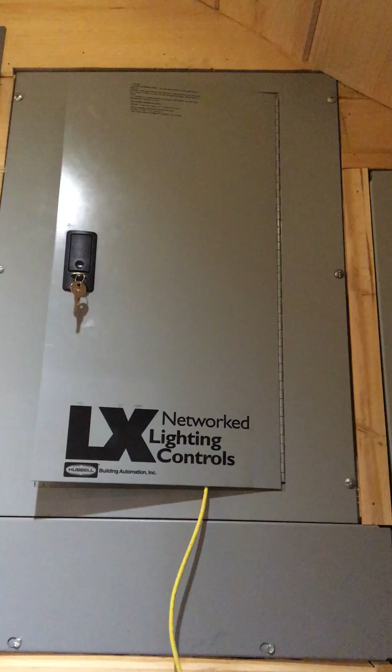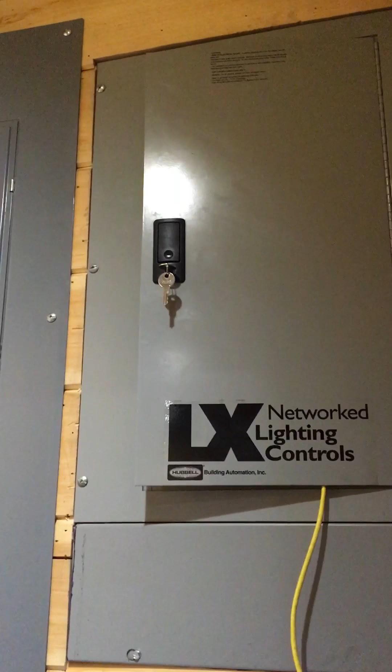Okay, so this is just going to be a quick overview of our LX lighting, our Hubbell LX lighting controls network. We actually have multiple of these out here at the facility. Essentially what we have here, this is the main relay panel.

This is one of the touchscreen tablets, with a longer cord so I can sit down here and work on it. These touchscreen tablets are first gen touchscreen from what I can tell. They're pretty clunky, but they do work.

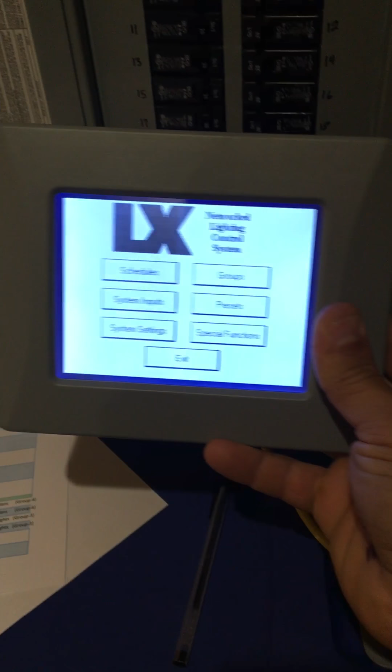This is a good one here, or it seems to be. I keep it separate from the others. I try to keep one at every unit, but this is the one I primarily use when I'm controlling from the building. The other thing we have is an interface.

I think that's like a Gen series, some sort of interface that we have plugged into our phone system. Our IT guy set that up, but it allows us to remotely log into these systems from the office and make changes from our office. So making changes is a whole lot easier and quicker than having to manually cycle through each setting here on this controller. So once again, you have your tablet controller, primary panel, and then our interface and modules.

I am not an expert when it comes to LX lighting controls. I have spent a lot of time reading the manuals. There's a lot to these that I do not understand as far as where the actual brain of the system is and all that kind of stuff. But my hope is that this allows an average technician or maintenance man to be able to program these systems and keep things up and going from a maintenance standpoint.

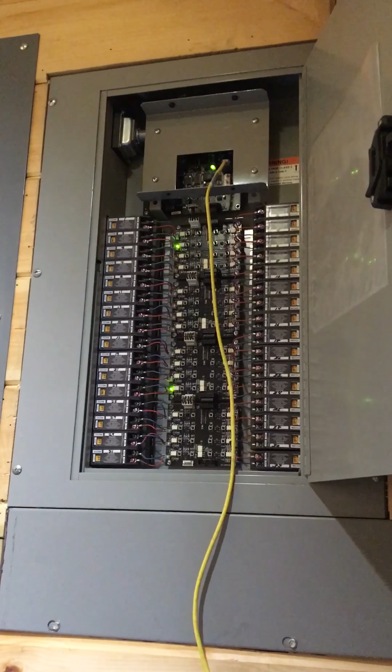Hubbell's technical support is lacking. There's about 2 guys that will answer questions. Both of them talk way over my head, so I've not found them very helpful.

So what we have is each of these is a relay. Each relay has a power feed coming in from your breaker box down here at the bottom. So this is panel C. This is all of my lighting controls, fan controls, everything that this panel controls. So you're going to have your main power feeding the relay, and then this relay is essentially controlled off of a computer that switches the relay, allowing the power to leave and go to the actual fixture.

So each of these, your relay number 1 is currently in the off position because the light's not lit, but we can push this button and we've turned it on. Off. So the first thing I had to do when I came in and started working on these systems was figure out what everything did.

We had a little tiny layout here, but it was never filled in. I had no clue what did what. So we literally had 2 radios, and one guy walked around, he would hit a switch, and I would just watch the light turn on. He would say, I'm in bunk room A, and he would hit the lights and it would bring that relay on. So I just wrote everything down and came up with this.

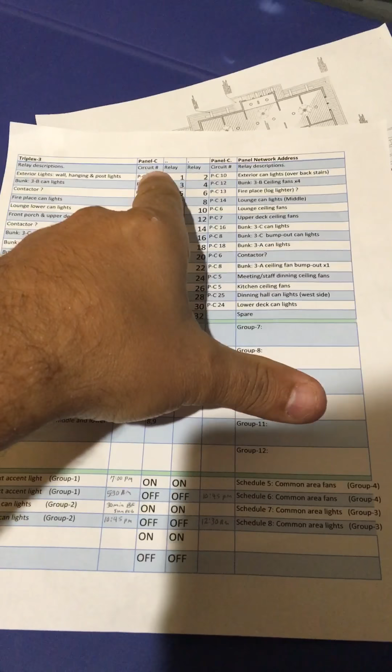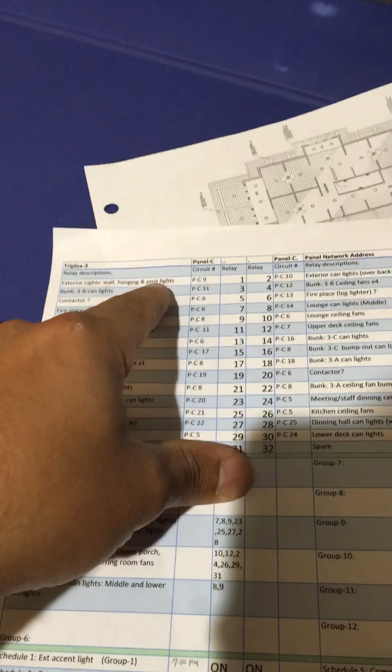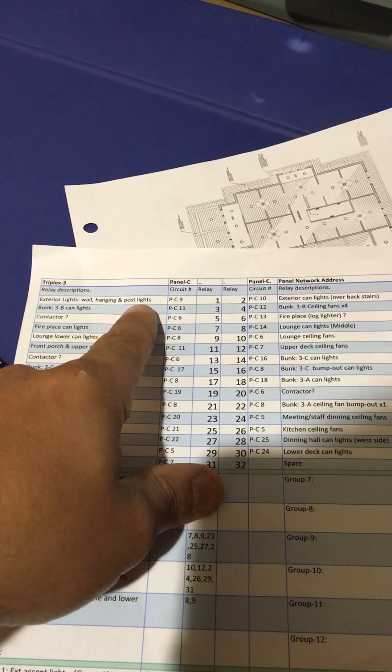So this is critical. This is our building triplex 3. We have the panel and the relay number here. So relay number 1 controls my exterior lights, wall hanging and post lights. There is not a switch station in this building for this relay. This relay is solely controlled off of its own group, but I have it controlled off of a schedule. So it's critical to come up with this.

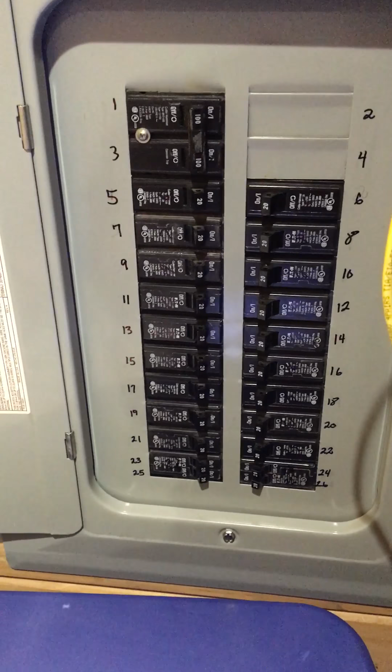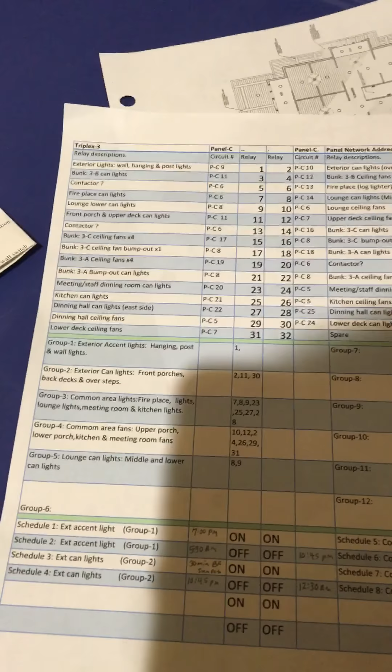So we have the description, the circuit number. My breaker number 9 in panel C will turn the power off to that relay. It doesn't turn the power off to the whole panel, just to relay number 1. Okay, and then we have our groups. So once you get all of this set up, you can actually start programming your groups and your schedules. I've got a video on programming groups and a video on programming schedules, but you essentially go in and program your groups and schedules once you know what does what.

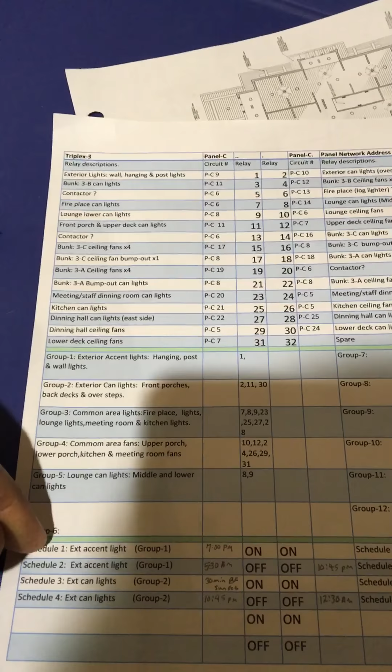So the way I have it set up here is my group 1, exterior hanging lights, post lights, blah blah blah, and that is relay number 1.

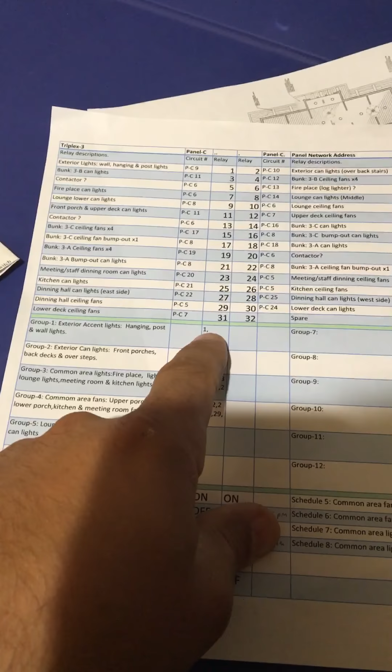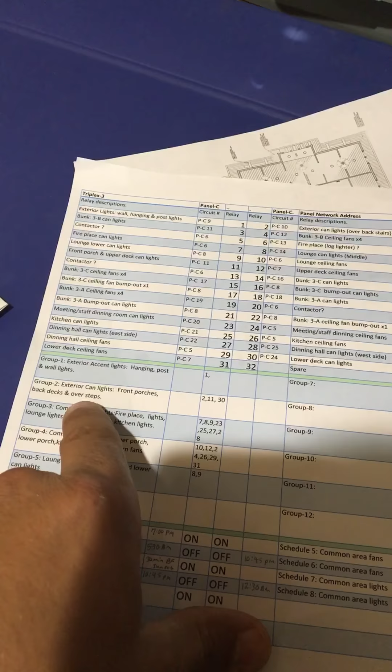Group number 2 actually has 3 relays in it. Relay 2, 11, and 30, which are my exterior can lights, front porch lights, back deck, and overstep can lights. And then my schedules down here.

Once again, your schedules turn them on, then your schedules turn them off. So you have one schedule for the on action, one schedule for the off action. And that's pretty much it with the panel.

The interface, I'm not real familiar with how all that works. That's your main power pack in there. I've not had to do much troubleshooting with that.

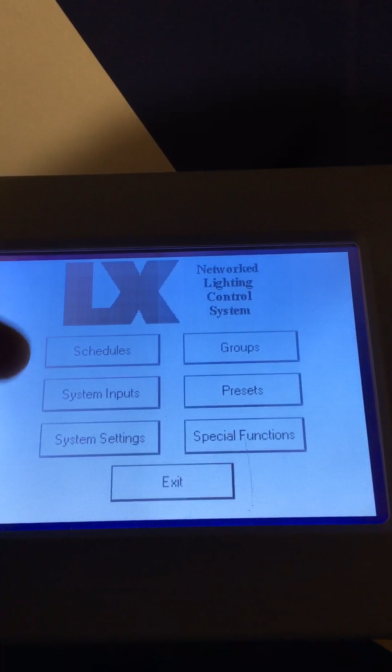Your controller, just a basic overview. You'll open it up, you have schedule, system inputs. An input is going to be a switch station. This is where you'd program your switch station.

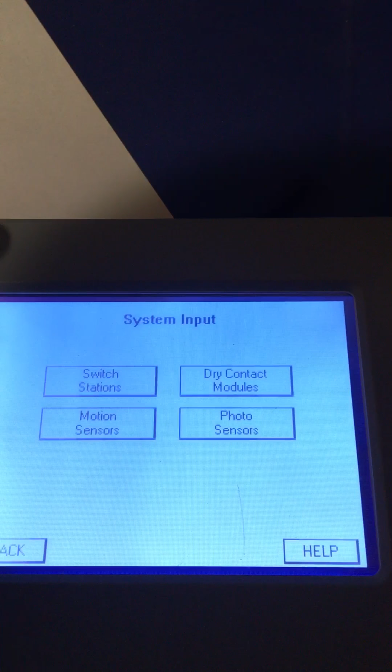You can have a motion sensor. These little guys right here, about $250 a piece. I don't know why you would ever need that. If you need a motion sensor, just hardwire it up to a standard 120 volt motion sensor.

Dry contact modules, I've never fooled with any of these. I don't know what that does exactly.

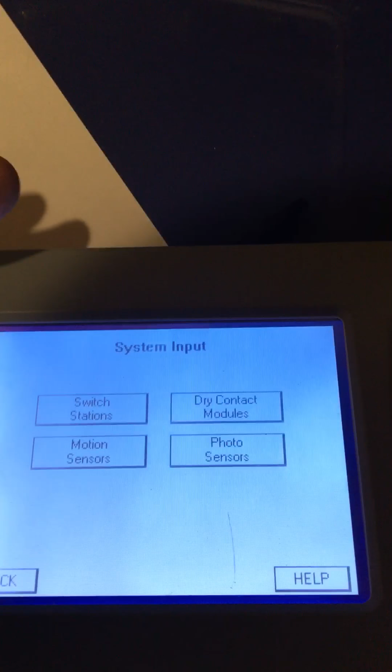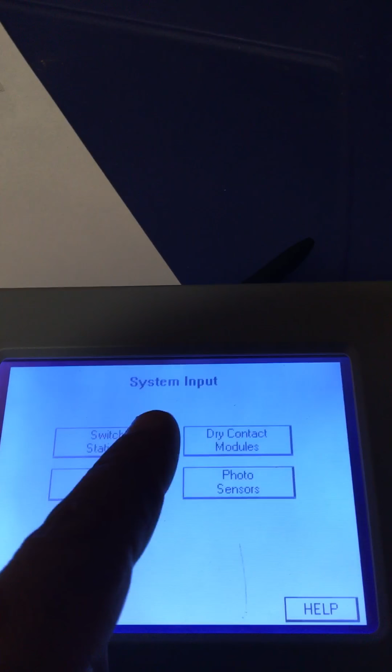And then photo sensors, that would be like a dusk to dawn. You could mount one of those outside to the building, and then you can program—I believe, now we don't have any on this controller—but if you were to purchase a photo sensor, you would mount it outside, feed to the panel, and then you can control your schedules or control stuff through your dusk to dawn photo sensors. It'll be your system inputs, schedules.

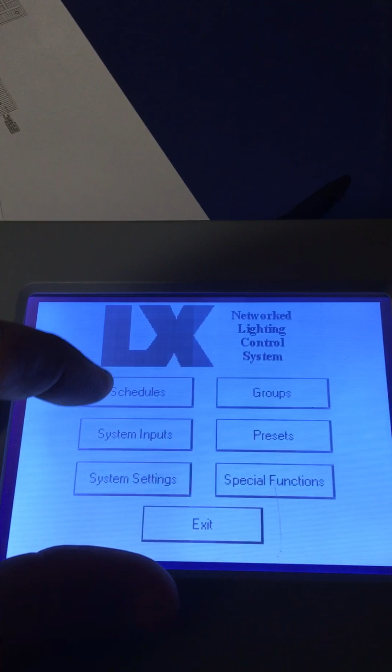You can view schedule, edit schedule, clear a schedule, name a schedule, and holiday schedules.

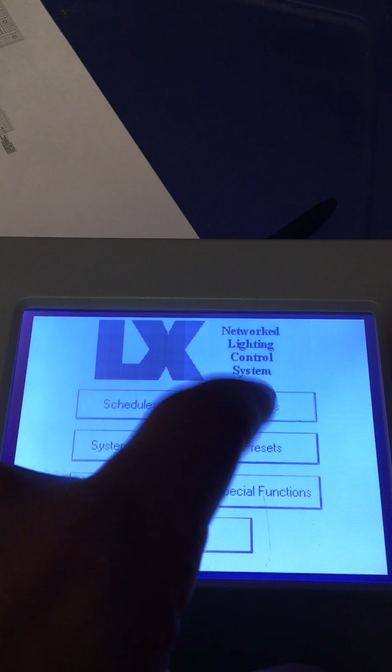Groups is kind of the same thing as schedules. View group, edit group, name group, clear group.

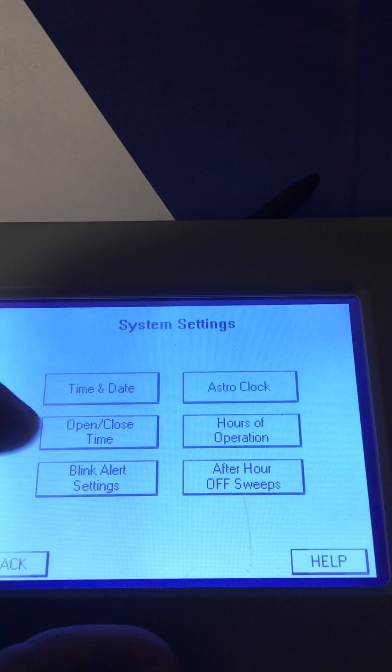System settings, date and time, open and close. I don't have any of this, the open and close, set up for anything we have. This is mainly just for, I would guess, a storefront.

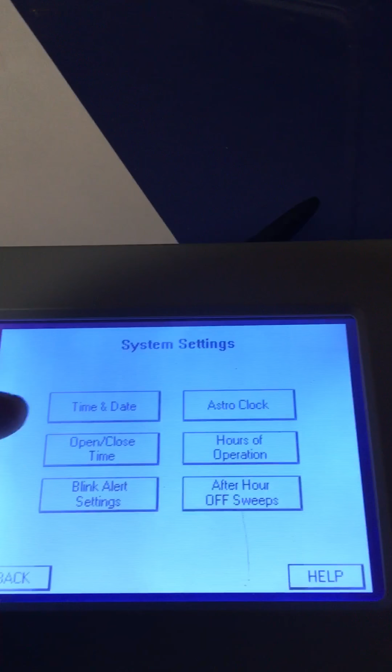There may be a way to set up a schedule where one schedule will both do the on action and off action. I have not done that. I just found that it's easy—we have plenty of room in these panels for creating schedules—so I've just done schedule 1 on, schedule 2 off.

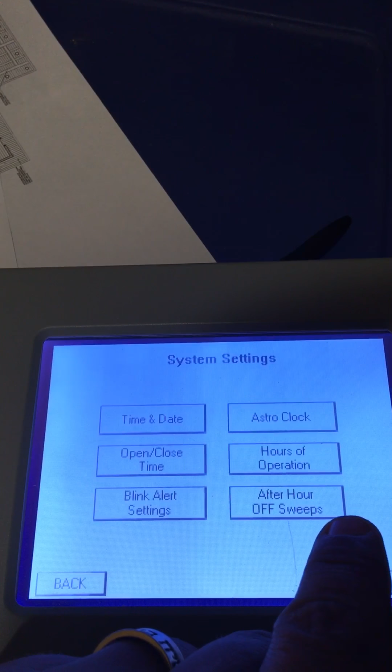And your alert settings, astro clock, hours of operation, after hours, off sweeps. I've not fooled with this at all. Once again, I think these three here are going to be more related to a business.

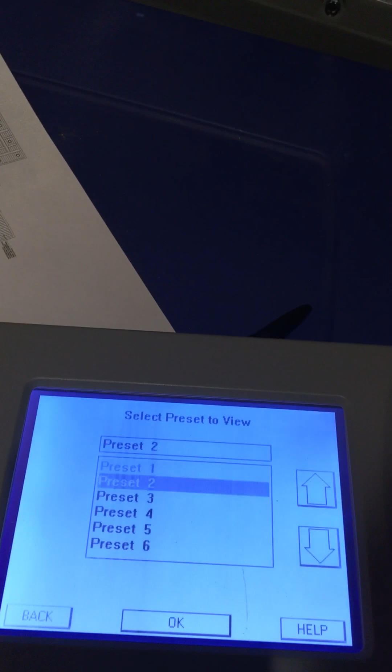Let's see here—presets, I have no idea what presets is. As soon as you click on it and you want to view a preset, it pulls this up into preset 2, preset 3. I should probably do some research on those. I might do it and get back with you guys, or do another follow-up video, but I'm not sure what those even do.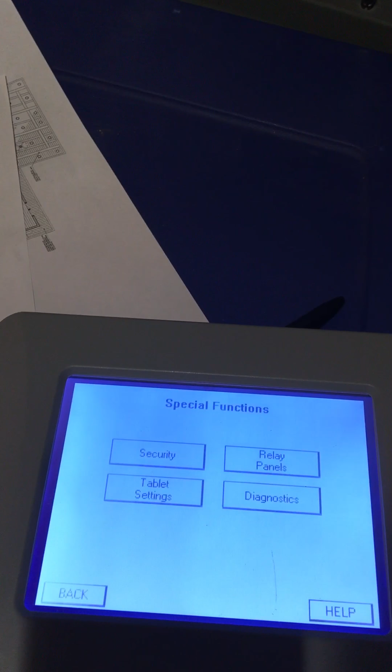And then we have special functions here: diagnostic, tablet settings, security, relay. Most of all that's pretty self-explanatory, and that's it. So that is a basic overview of the system.

And then once again, you have your switch stations here. This is a single button coming out of a 3-button box, and each switch station—when you pull this cover off—give me just a minute while I've got you guys trapped here. We'll pop this cover off, because I think the majority of folks, this is going to be as far as you go with these systems.

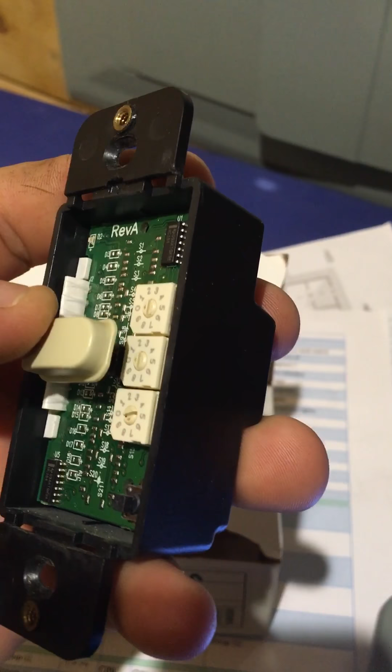So once you pull this off, you have your dials back here that basically set the switch number, and that correlates with your system input. You just go in and set this—you can see here the top arrow is 0, second arrow is 0, third arrow is 7. So this was switch station number 7, and it's a single toggle switch.

So you set this, put it into the circuit—this is DC voltage—and you program this, and it communicates with the motherboard here. So this can be your on and off action for any particular relay. You can actually also control a group with them. So those are your basic switches.

They come all the way up into a 6-button configuration. So hope that helps somebody, and that's it.